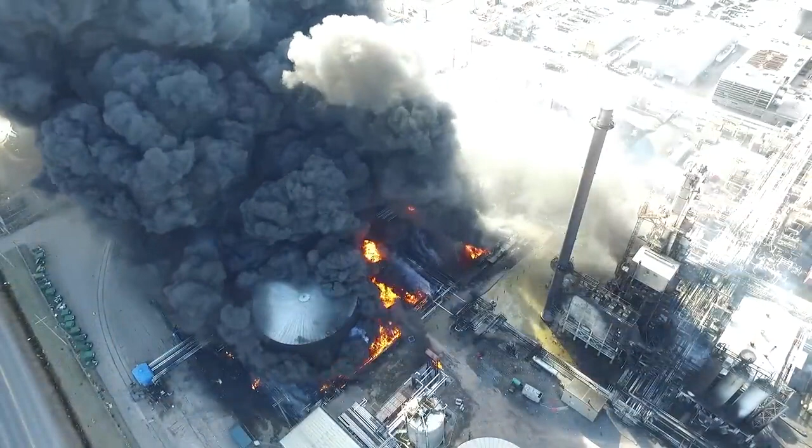April 26, 2018, the Superior Refinery in Superior, Wisconsin. A large explosion erupted during a maintenance shutdown, puncturing a tank of asphalt that spilled into the refinery. The asphalt later ignited, causing a huge fire.

The incident injured 36 workers, caused roughly $550 million in damage to the facility, and released 39,000 pounds of flammable hydrocarbon vapor into the air.

Over 2,500 residents of the city of Superior were evacuated from their homes, and the city of Duluth, Minnesota, issued a shelter-in-place order. Refinery shutdowns, as well as startups, can be particularly dangerous because processes are not in normal operation mode. Our investigation found that critical safeguards were not in place during this shutdown, and that the procedures followed at the refinery were not correct.

The result was a massive explosion and fire that injured dozens of workers, caused hundreds of millions of dollars in damage, and threatened the surrounding communities.

The explosion and fire thankfully didn't compromise a nearby storage tank that contained highly toxic hydrofluoric acid. But the CSB considers this incident to be a serious near miss involving HF. If hydrofluoric acid had been released, this could have been much worse.

Shortly before 6 a.m. on the day of the incident, operators took steps to shut down the refinery's fluid catalytic cracker, or FCC unit, for periodic maintenance and inspection. The FCC unit uses heat and a solid catalyst to break or crack heavy hydrocarbons from crude oil into smaller hydrocarbons, which can then be blended into gasoline and other products.

To initiate the shutdown of the FCC unit, refinery workers stopped the flow of hydrocarbons to the reactor and closed the two slide valves connecting the reactor to the regenerator. Circulation of the catalyst stopped, but one of the two slide valves was eroded. Catalyst from the reactor fell through the valve to the regenerator, leaving an open path for air or hydrocarbons to flow between the two pieces of equipment.

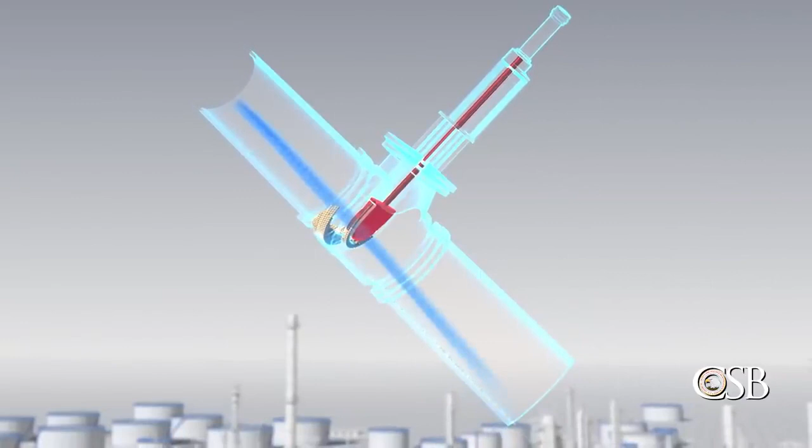Without other critical safeguards in place, air from the regenerator flowed backwards through the slide valve into the reactor. The air then moved into the main column and other equipment downstream of the reactor, where it formed a flammable mixture with hydrocarbons. At approximately 10 a.m., the hazardous mixture of air and hydrocarbons found an ignition source, and there was a large explosion.

Debris from two vessels flew into the air. One piece traveled about 200 feet and hit a large above-ground storage tank, puncturing the side of the tank and releasing hot asphalt. Asphalt poured out of the tank over the containment berm and into the refinery's operating units, where it spread along the ground.

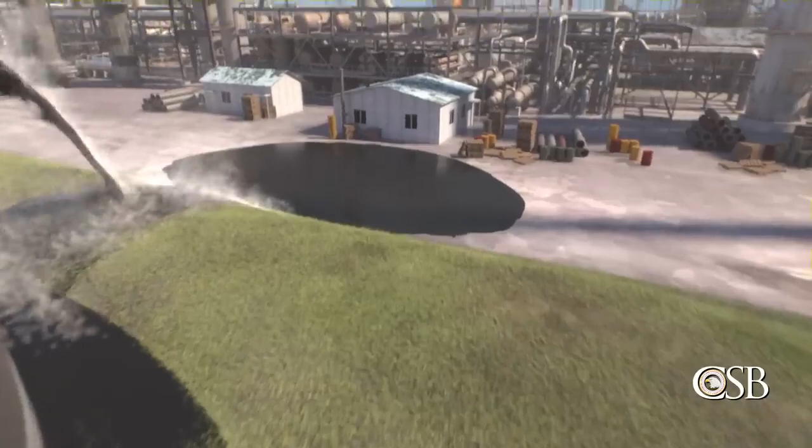At around 12 p.m., the released asphalt ignited at the storage tank and a fire broke out. The fire traveled along the stream of asphalt to the refinery's crude and FCC units. The fire produced a huge plume of black smoke, leading to the evacuation of a portion of the city of Superior. Typically, this type of asphalt fire can burn for days.

A plan to extinguish the massive asphalt fire was developed by the refinery's emergency response team. The refinery began to address the fire together with the Superior Fire Department. They used a combination of dry chemical fire extinguisher and water to attack the fire from multiple directions and surround it within a containment area.

With the fire contained, emergency responders were able to put out the asphalt fire at around 7 p.m. The asphalt fire had been extinguished in a matter of hours, as opposed to days as had been initially anticipated. The evacuation order was lifted, and Superior residents were allowed to return home. Nevertheless, 36 Husky employees and contract workers sought medical attention for injuries.

The Chemical Safety Board launched an investigation and identified 6 safety issues that led to the explosion and fire. They are: transient operation safeguards, process knowledge, process safety management systems, industry knowledge and guidance, brittle fracture during extreme events, and emergency preparedness.

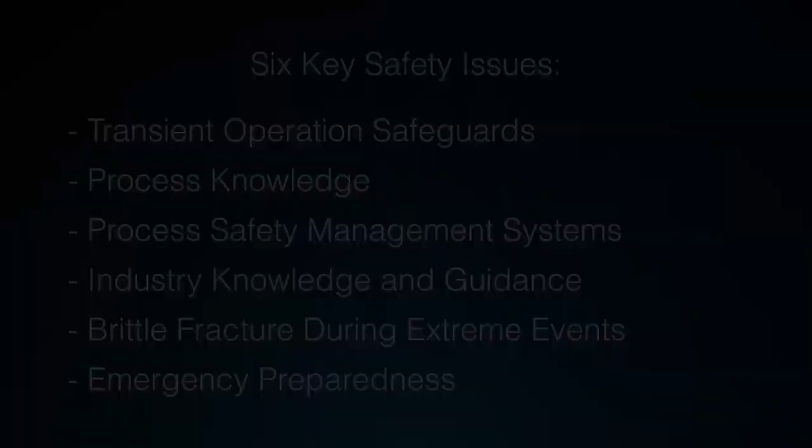The first safety issue is transient operation safeguards. At the time of the incident, the Superior Refinery was shutting down the FCC unit. Shutdowns, like startups, standbys, and emergencies, are known as transient operations, meaning activities that take place outside of normal process operations. Transient operations can pose unique hazards that are not present during normal operations.

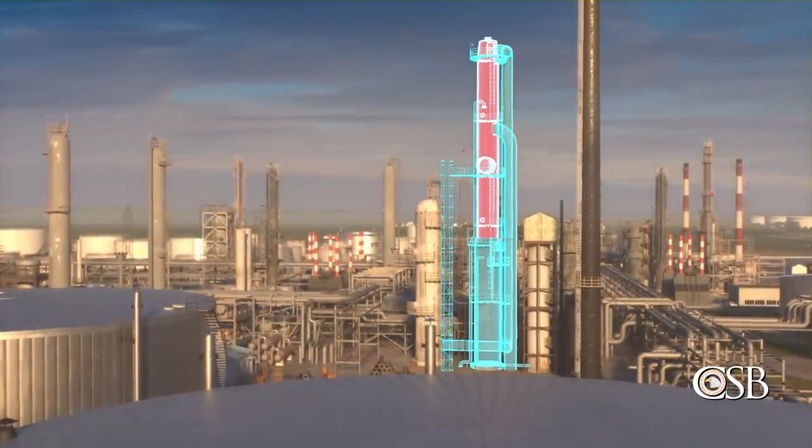An FCC unit presents atypical hazards during transient operations because air and flammable hydrocarbons are present within interconnected equipment, which increases the likelihood of an explosion. Therefore, during the shutdown of an FCC unit, certain FCC-specific safeguards must be in place to ensure that air and hydrocarbons do not mix.

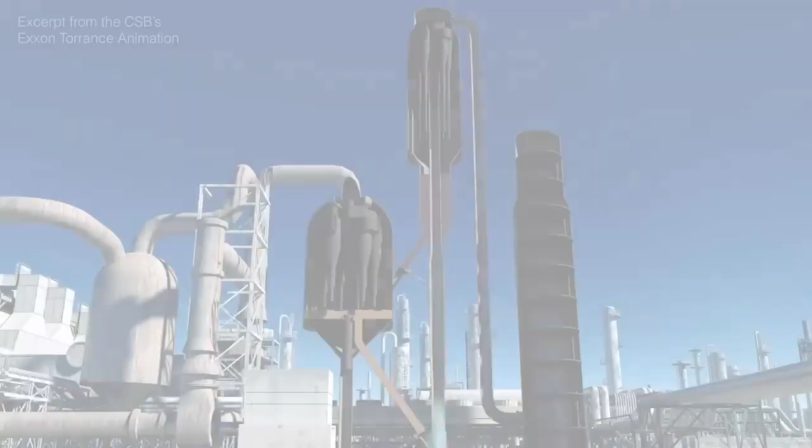But the CSB found that at the Superior Refinery, these safeguards were not implemented or were ineffective. One such safeguard is to create a reactor steam barrier. This is done by injecting a large amount of steam into the reactor, creating a higher pressure in the reactor than in the connected equipment.

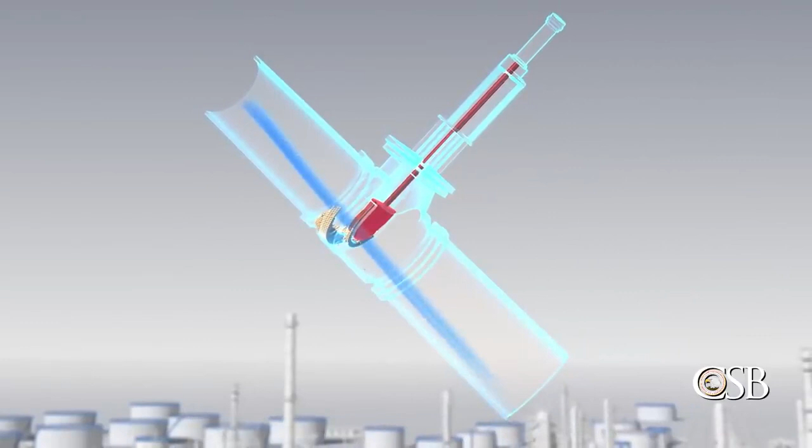This prevents air from the regenerator from flowing into the reactor, where it can then enter the main column and other equipment on the hydrocarbon side of the process. However, Superior Refinery's shutdown procedure did not call for a reactor steam barrier, but instead instructed the board operator to maintain the regenerator at a higher pressure than the reactor at all times. Following these instructions set the refinery on a path toward disaster, as this hazardous pressure differential ensured that air from the regenerator would flow into the reactor.

And onward into the hydrocarbon side of the process, where a flammable mixture formed. Another critical safeguard that should be in place during an FCC unit shutdown is to use natural gas or nitrogen to purge air from the main column to the flare system to prevent oxygen accumulation inside the equipment.

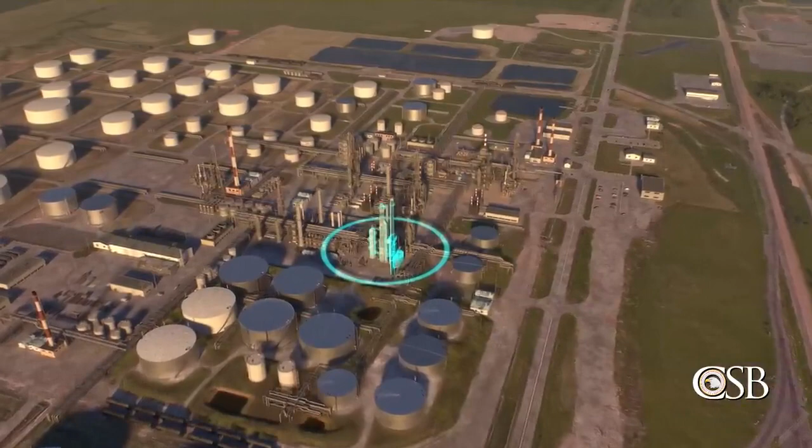But the CSB found that even though Superior Refinery had the ability to purge air out of its main column, the refinery had not incorporated this safeguard into its operating procedures for transient operations or its operator training program, so it was not done. Instead, the refinery overly relied on the catalyst slide valves to keep the air and hydrocarbon systems separated during the shutdown.

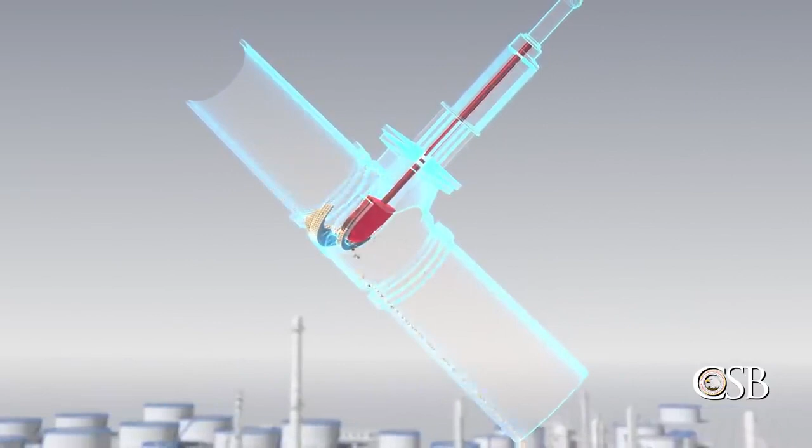But slide valves are designed to control flow of catalyst during normal operations, not to prevent flow of air and hydrocarbons during a shutdown. And one of the slide valves was eroded after years of use. Therefore, without other safeguards in place, air was readily available to pass from the regenerator through the worn slide valve into the reactor and onward into the hydrocarbon side of the process.

During transient operation for any process involving flammable materials, operators need to understand the potential for air to enter and accumulate inside equipment. Written procedures should be in place that outline safeguards meant to prevent air and hydrocarbon mixtures, and operators should be trained to understand why those safeguards are critical.

To that end, the CSB made a recommendation to the new owners of the refinery, Cenovus Energy, to establish safeguards to prevent explosions in the FCC unit during transient operation and incorporate these safeguards into written operating procedures.

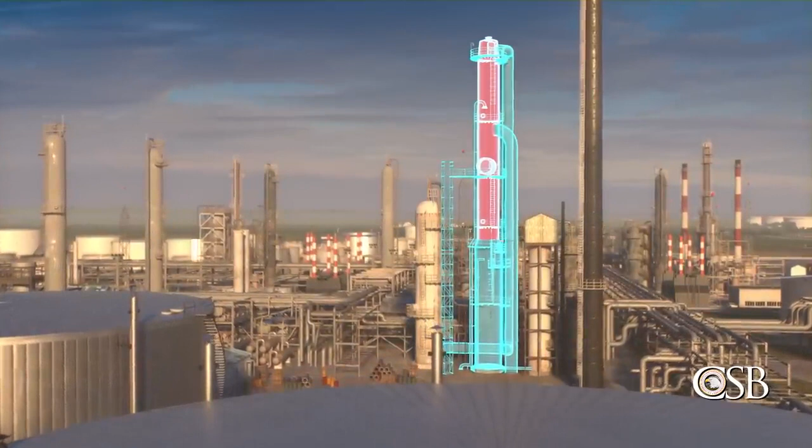The second safety issue found by the CSB is process knowledge. The CSB found that throughout the history of the Superior Refinery, under several owners, its FCC expertise was mostly in-house and with minimal engagement with other refineries. In addition, the refinery's use of external technical experts was limited to assessing the FCC unit's performance during normal, not transient operations.

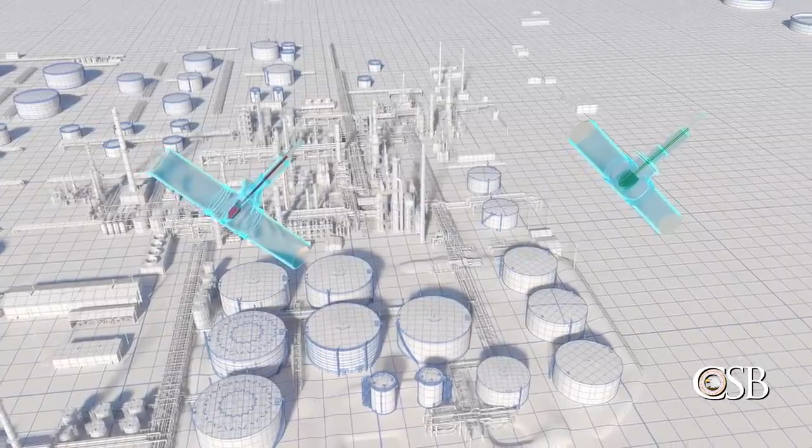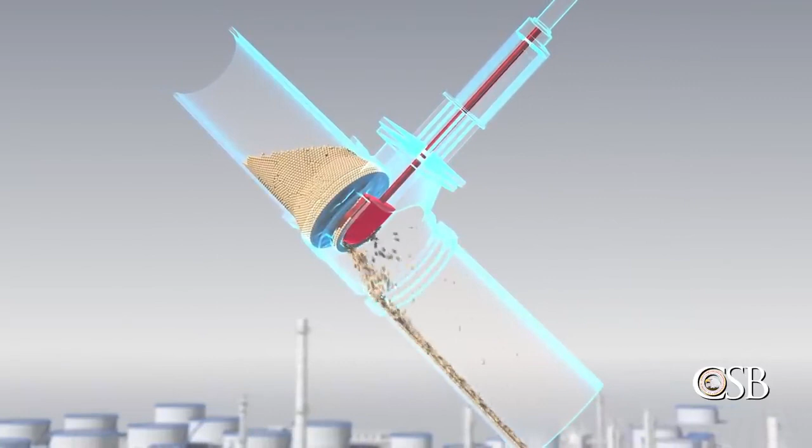The Superior Refinery required its operations department to review and recertify its operating procedures annually. But the refinery had not performed a technical review of its FCC unit operating procedures with its process engineers, the FCC technology licensor, or outside consultants for at least 25 years prior to the incident, and possibly since the unit was commissioned around 1960.

As a result, the refinery's shutdown procedures, which instructed operators to maintain the regenerator at a higher pressure than the reactor at all times, directly contradicted the FCC technology licensor's guidance and created the dangerous condition that enabled the explosion to occur.

The Superior Refinery had serious errors in its FCC unit operating procedures that directly led to the explosion. But refinery employees did not have sufficient process knowledge of FCC unit technology to recognize the problem. Had the refinery engaged with other sites or outside experts to review its operating procedures, the technical errors could have been identified and corrected, and the explosion could have been prevented.

Therefore, the CSB made a recommendation to Cenovus Energy to develop and implement a technology-specific knowledge-sharing network program across all Cenovus-operated refineries, which at a minimum includes an FCC technology peer network.

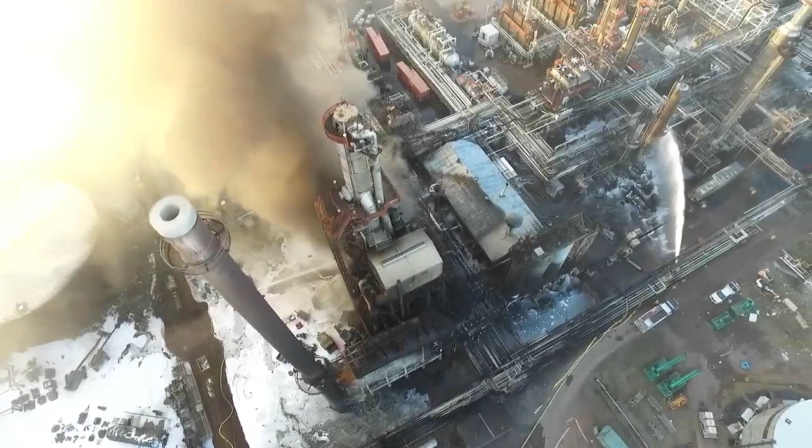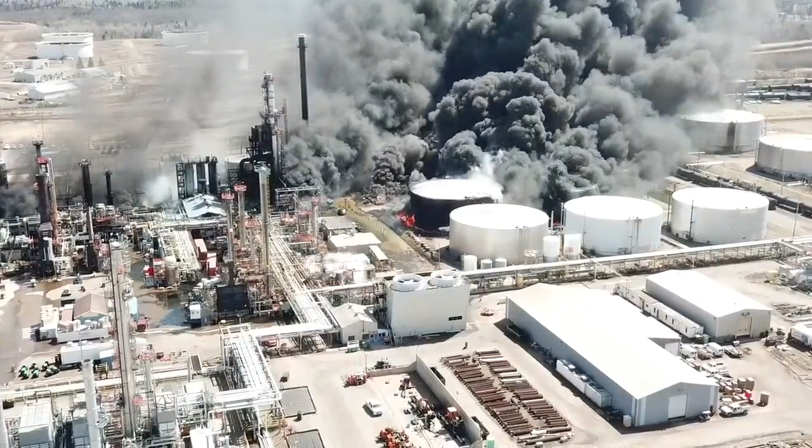The third safety issue highlighted by the CSB is process safety management systems. OSHA's Process Safety Management Standard and the EPA's Risk Management Plan rule require facilities like the Superior Refinery to implement process safety management systems. Process Safety Management, or PSM systems, are meant to identify, evaluate, and control process hazards.

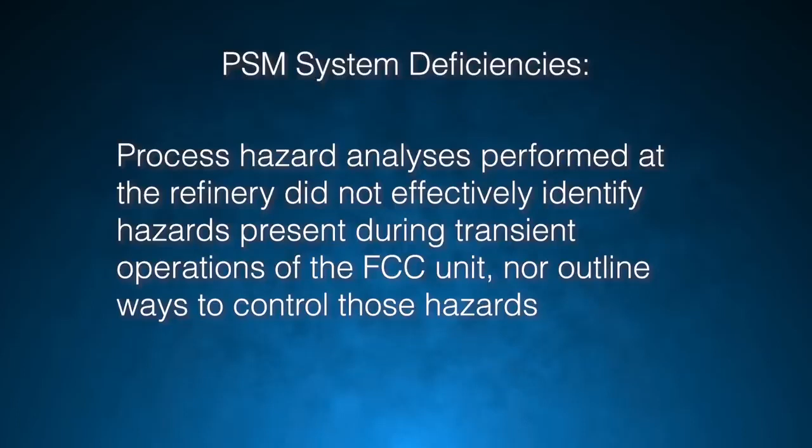But the CSB found that the refinery's PSM systems were inadequate. For instance, the refinery's process safety information did not include the operating manual published by the FCC technology licensor. Process hazard analyses performed at the refinery did not effectively identify hazards present during transient operations of the FCC unit, nor outline ways to control those hazards. The refinery's operating procedures lacked clear instructions and were not technically evaluated. And the operator training program at the refinery did not properly prepare operators to shut down the FCC unit safely.

The deficiencies we found in Superior Refinery's process safety management systems directly contributed to the explosion. To prevent catastrophic incidents, companies should ensure that their PSM systems are effective at identifying, evaluating, and controlling process hazards, not just during normal operations, but during transient operations as well. As a result of its findings, the CSB made a recommendation to OSHA to develop guidance documents for performing process

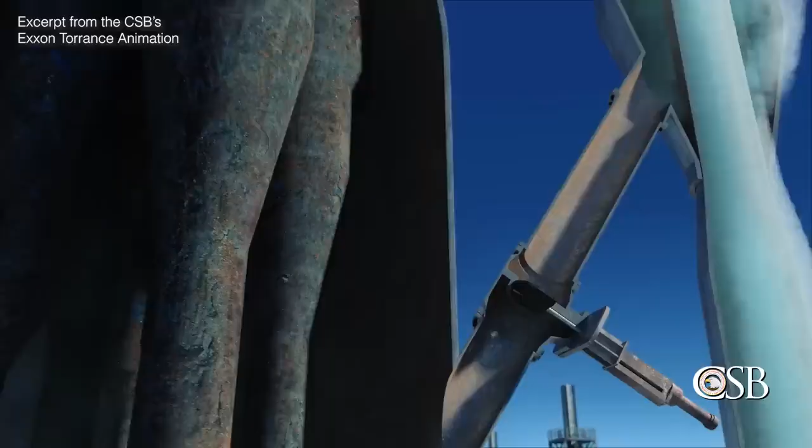The fourth safety issue found by the CSB is industry knowledge and guidance. The explosion at Superior Refinery occurred less than one year after the CSB released its report on a similar explosion at the ExxonMobil refinery in Torrance, California. Industry trade groups distributed lessons learned from the California incident, as well as the CSB's safety video on the explosion. But despite these educational efforts, employees at the Superior Refinery did not learn or apply these key lessons in a way that could have prevented the explosion at their refinery.

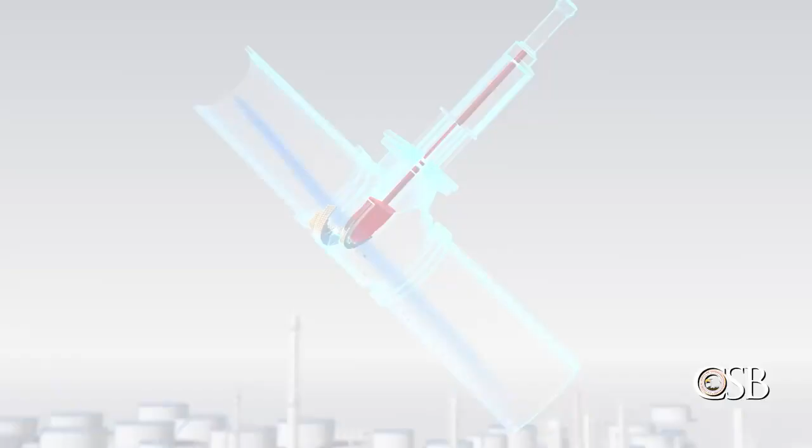For example, the workforce appeared to understand that flammable hydrocarbons had flowed from the California refinery's main column into the regenerator and subsequently exploded. But they did not recognize that the reverse was also possible. Therefore, they did not realize a similar explosion was preventable by implementing a reactor steam barrier.

In addition, there is currently no industry publication that establishes common basic process safety expectations for all FCC units. Although the refining industry has accumulated many years of FCC process safety knowledge from its members, this information is scattered, complex, and not easily accessible to some refinery employees. The CSB believes that a publicly available technical publication outlining recognized and generally accepted good engineering practices for safe FCC operation and incorporating lessons learned from this and other similar CSB investigations could help drive important safety improvements in FCC units across the United States.

Therefore, the CSB made a recommendation to the American Petroleum Institute to develop a publicly available technical publication for the safe operation of FCC units that is applicable to both new and existing units.

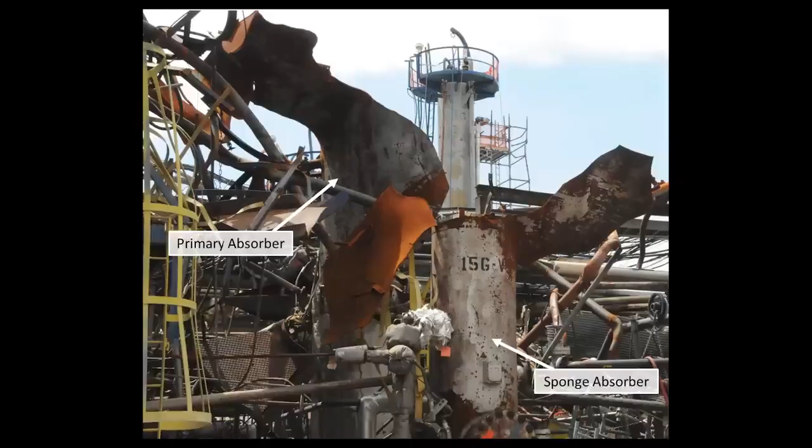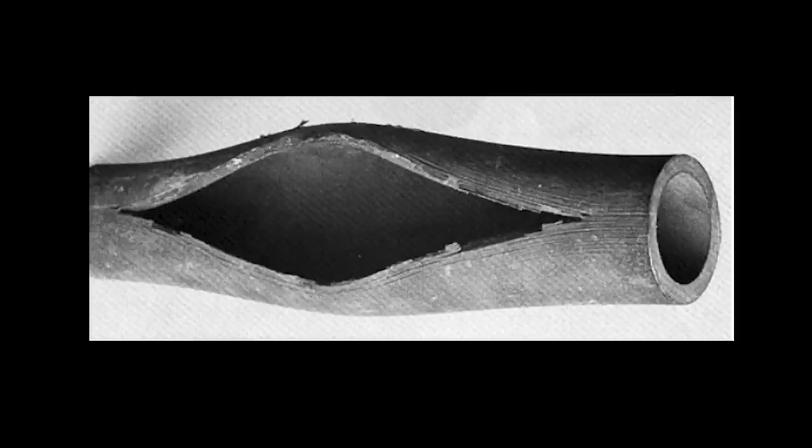The fifth safety issue outlined by the CSB is brittle fracture during extreme events. The two process vessels that exploded were constructed from a grade of steel that is no longer recommended for new equipment. The vessels failed by brittle fracture, which means that they shattered like breaking glass. When the vessels failed, the force of the explosion sent over 100 metal fragments from the shattered vessels around the refinery. One large piece struck and punctured the nearby asphalt tank. Had the process vessels been made of a newer grade of steel with better toughness properties, they would have more likely torn open rather than shattered, resulting in fewer, if any, dangerous projectiles.

While some vessels may be deemed fit for service, they're not usually assessed for their performance during an explosion. Selecting materials of construction that are not susceptible to brittle fracture can help lessen the impact to the surroundings should an extreme event occur.

The sixth and final safety issue noted by the CSB is emergency preparedness. The Superior Refinery uses highly toxic hydrofluoric acid, or HF, in its alkylation process. The HF storage tank was about 150 feet away from the two vessels that exploded, which is about 50 feet closer than the asphalt storage tank that was damaged. The HF tank was not punctured or otherwise compromised, but the CSB considers this incident to be a serious near-miss event with hydrofluoric acid.

Explosion debris did, however, puncture the asphalt storage tank, causing over 17,000 barrels of hot asphalt to spill out into the refinery, where it accumulated for approximately 2 hours before it ignited. It was only a matter of time until the spilled asphalt caught on fire. Had emergency responders treated the asphalt as a flammable liquid, they could have taken more effective action sooner to control the asphalt spill before it ignited.

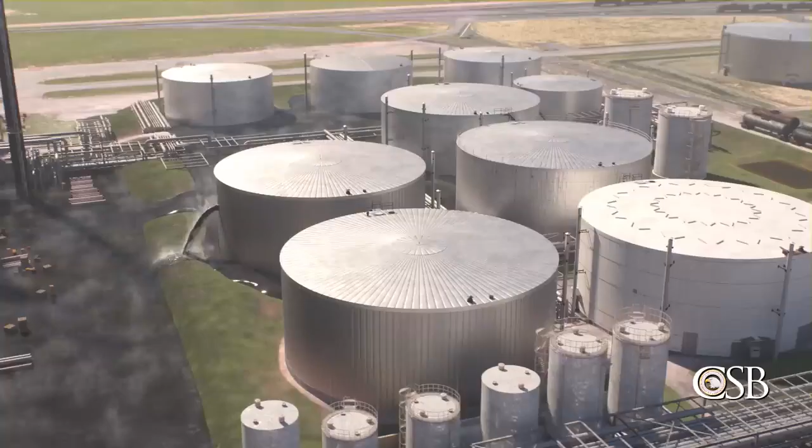The result is that the initial explosion escalated into a large fire that caused hundreds of millions of dollars in property damage. In addition, smoke from the fire and the potential for an HF release prompted the City of Superior evacuation order, causing disruption to over 2,500 members of the surrounding community. The refinery remained shut down for more than 4 years following this incident.

In response, the CSB made a recommendation to the EPA to develop a program that prioritizes and emphasizes inspections of FCC units in refineries that operate HF alkylation units to verify that safeguards that prevent explosions during transient operations are in place.

The incident at the Superior Refinery should serve as a wake-up call to other refineries, especially those that have hydrofluoric acid alkylation units. During transient operations like shutdowns and startups, refineries must have necessary safeguards in place and follow correct procedures to prevent disasters from occurring. Thank you for watching this CSB safety video.